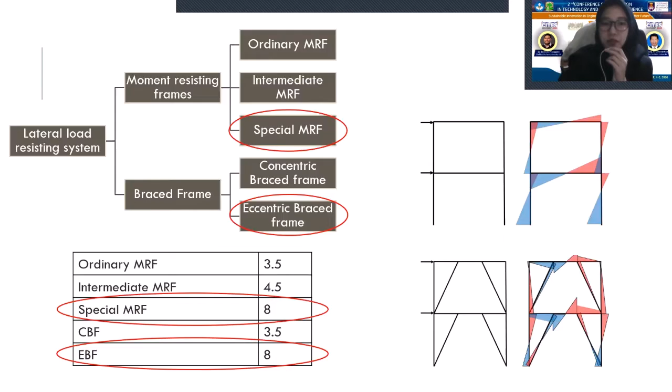The EBF combines the high elastic stiffness characteristic of a concentrically braced frame and the energy dissipation stability of a moment resisting frame. The longer length allows energy dissipation through flexural yielding, while the shorter length dissipates energy through shear yielding. However, for architectural reasons, the flexural link is preferable since the system allows for a larger clearance than that of shear link EBFs.

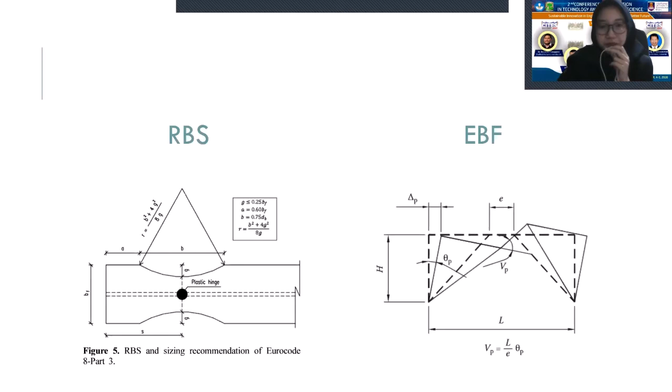This research aims to investigate the dynamic parameters of the one story of RBS and EBF system through forced vibration test. Eccentric mass shaker was used to induce the sinusoidal dynamic force. Two modal parameters, natural frequency and equivalent damping ratio, were obtained. And now move on to the research methodology.

The test was conducted on a knockdown frame that was purposely designed to support the dynamic test of two systems, the RBS and the EBF. The main frame consists of 3-meter long column, beam, and composite slab. The test was conducted twice, and it was started with the RBS followed by the EBF. The RBS was uninstalled when the second test was conducted.

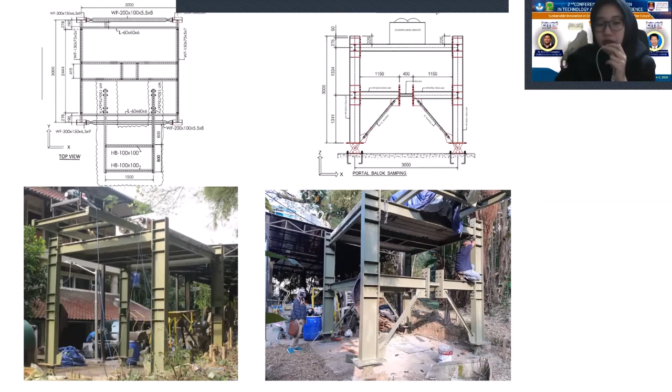The EBF system was located on the elevation of plus 1,541 millimeters. Detail of RBS system is shown on the left, and for the EBF system is shown on the right. The load was induced by the eccentric mass vibrator system, and it was a sinusoidal load with a frequency identical to the structure's natural frequency.

The EMS used a two-arm drive system that produced a single directional force. The force exerted by the vibrator can be calculated using the following equation. The structural response was recorded using vibrometer and accelerometer. The accelerometer can capture response in all directions, longitudinal, transversal, and vertical. Meanwhile, the vibrometer only measures the longitudinal direction according to the laser shooting. At this test, the sensor was fired into the center of the beam.

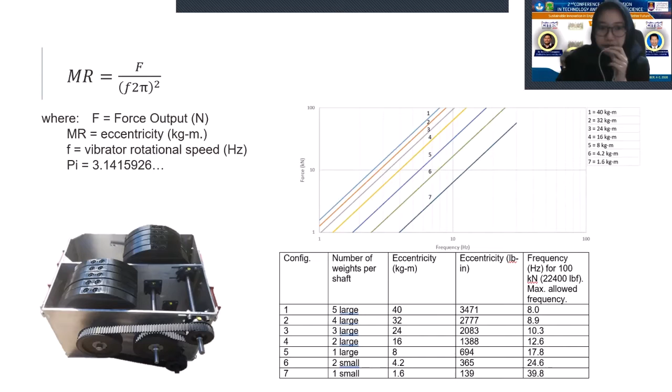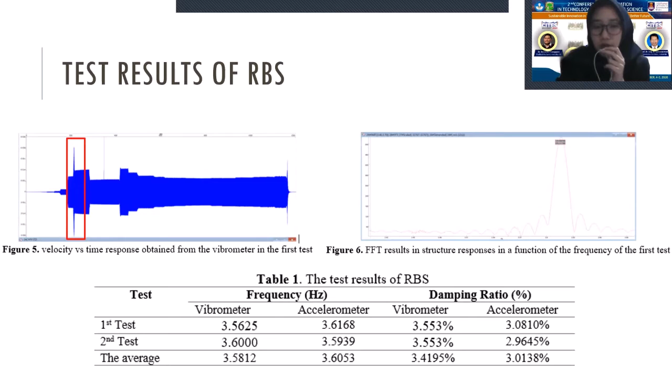And now the results and discussion. This is the results of RBS. The structure was induced by sinusoidal forces twice. Firstly, the force frequency was increased in large increment, and secondly, the frequency was increased smoothly near to the natural frequency of the structure. As can be seen from table 1, the measurement of accelerometer and vibrometer was very close, and the average natural frequency from the test was 3.5933 Hz.

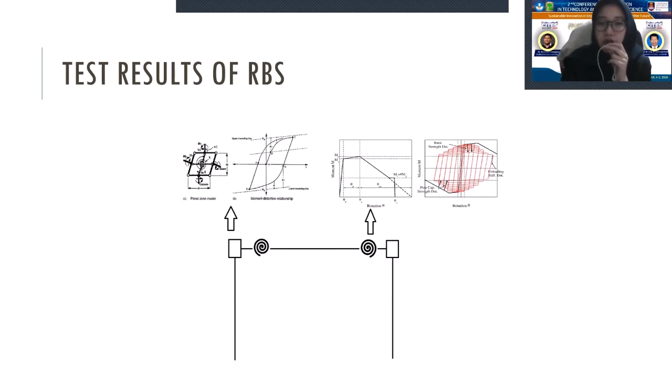The dynamic finite element analysis using OpenSees software was conducted for further analysis. Nonlinear beam column element was used to model the column and the beam. Concentrated plastic hinge was assigned to represent RBS. Properties of plastic hinge were defined by rotational spring based on Ibarra modified Krawinkler to describe the nonlinear behavior of the frame. The dynamic load applied in finite element analysis was selected from the test, which produced the maximum displacement response as 0.618 millimeters. The natural frequency was 3.6111 Hz.

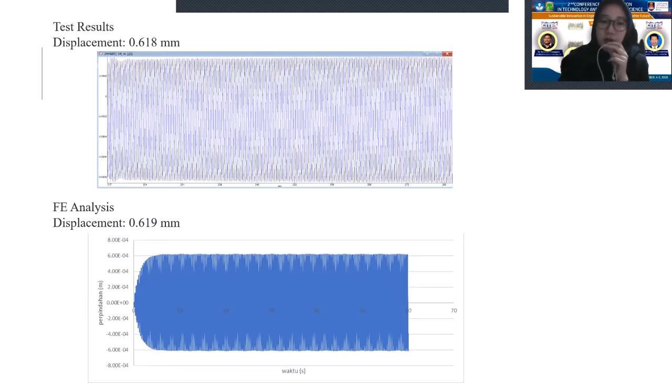Based on the first test, the sinusoidal force with similar frequency was then applied to the finite element model. The displacement response based on the finite element analysis was 0.619 millimeters, which was similar to the test result of 0.618 millimeters. It can be concluded that finite element analysis with OpenSees can imitate the dynamic test very well.

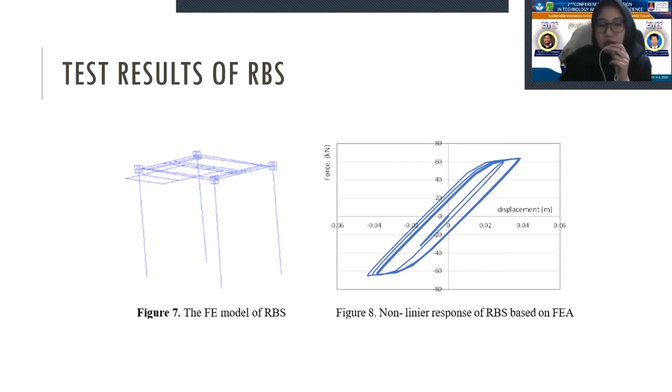As can be seen, the RBS reached the plastic zone, where the ultimate load was much higher than the force applied. It can be explained that the RBS experienced resonance since its natural frequency was equal to the frequency of the external force.

And this is the result of the EBF. Similar to the first test, the EBF was tested twice under free vibration and forced vibration. Figures on the left show the reading of accelerometer number 1 in both conditions. The signal obtained in time domain was then converted to frequency domain. The natural frequency and the period of the EBF based on accelerometer number 1 was 6.049 Hertz and

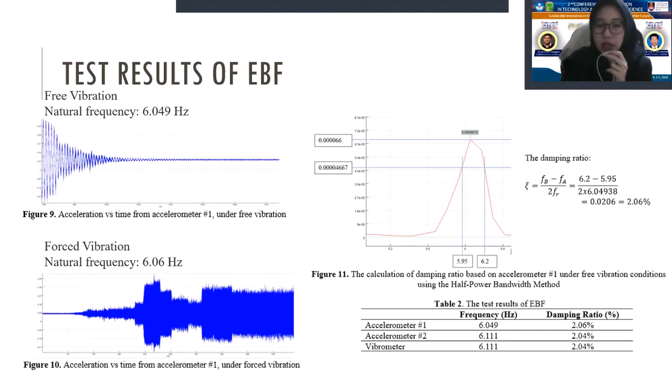The finite element analysis using OpenSees was carried out as a comparison. According to the experiment, the EBF was categorized as a flexural link. So Steel02 was selected for the steel material, which is a uniaxial Giuffre-Menegotto-Pinto model with isotropic strain hardening. Truss element was assigned for bracing. Beam and column used the nonlinear beam column element that assumes plastic deformation to be distributed along the element. Link was defined with elastic element, where the plasticity is concentrated at the end of the link.

A similar loading condition as applied in the experiment was used. The excitation with a light load of 0.11625 kg was induced with gradually increasing frequency. The structural response was in the elastic stage. The displacement reading from the vibrometer was used to compare the finite element analysis and the experiment.

Figure 12 shows the vibrometer response, where the minimum and maximum displacement was 0.73 millimeters and 0.98 millimeters respectively, thus having a displacement of 0.855 millimeters. The finite element result is shown in figure 13. The displacement obtained is almost similar to the experiment, which is

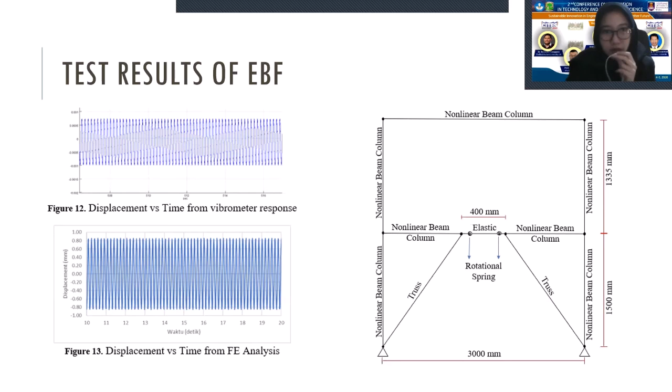0.853 millimeters. For the conclusion of the presentation, the forced vibration can be conducted by using EMS. The linear dynamic responses obtained from the test are the natural frequency and the damping ratio. The natural frequency of the RBS steel frame is about 3.614 Hz, which is similar to the finite element analysis as 3.623 Hz. Meanwhile, the damping ratio is 3.149%. Similar displacement response was attained from the test and the finite element analysis.

The natural frequency of the structure gained from the test is around 6 to 6.133 Hz, while the finite element analysis result is 6.13 Hz. Moreover, the damping ratio based on vibrometer and accelerometer measurement is between 2.04 to 2.06%. The elastic displacement obtained from the experiment is 0.855 millimeters, which is almost identical to the displacement from the finite element analysis as 0.853 millimeters.

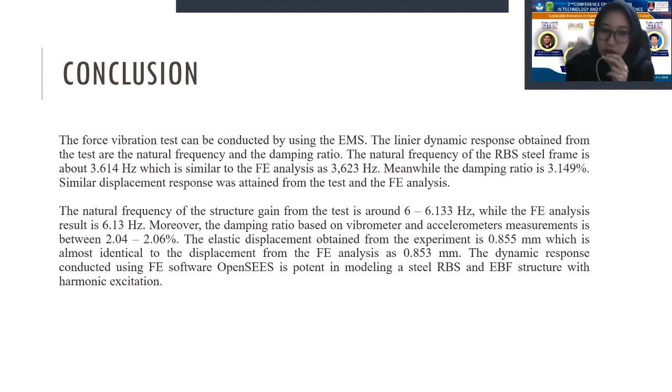The dynamic response conducted by using finite element software OpenSees is potent in modeling a steel RBS and EBF structure with a harmonic excitation. These are the references used for this paper.